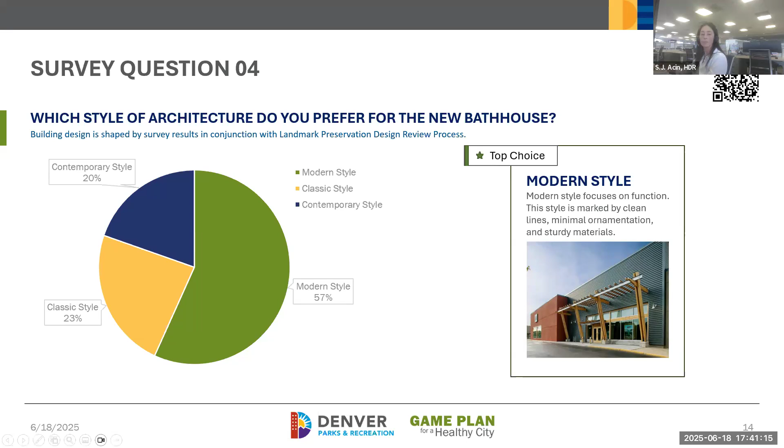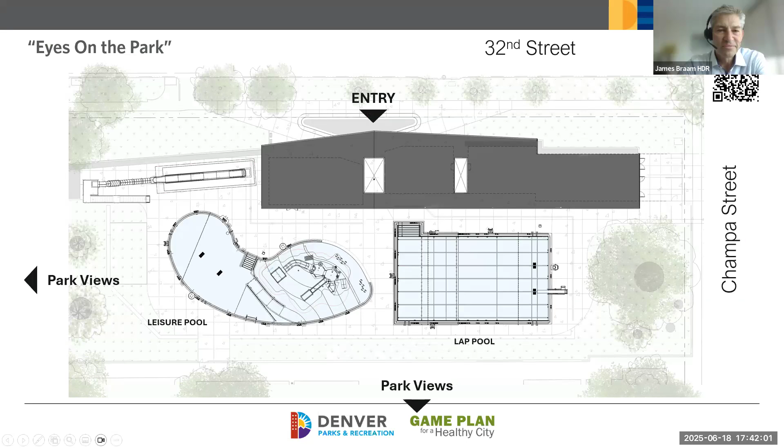Thank you, SJ. Hello, good evening, everybody. We're happy to be here with you this evening and share a lot of the hard work and feedback that we've been receiving, and put that into a lot of love and drawings.

This is a site plan that we're looking at. So the pool location remains at the same site, 32nd and Champa. But you'll notice a very big difference, something that we think is going to make this project a big success. The diagram has flipped and mirrored. So now the building and the bathhouse has pushed forward to 32nd, and the pools have pushed downward to the south, more towards the park.

What makes that really a nice move, a nice success, is that right now the pools look right out onto the street, onto the traffic. This starts to create a zone that celebrates the pool area and that pool deck. So Eyes on the Park now really celebrates the views onto the park. And now what is also happening as the building pushes forward towards the street, the entrance will be off 32nd, where we'll have a welcome plaza that we'll show you some renderings of.

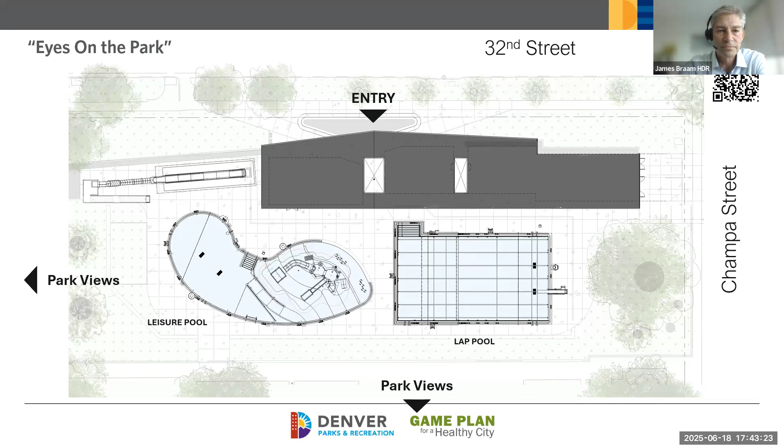As SJ had mentioned, going back to the survey and listening to the response from the community, we were pleased to be able to get your top two choices into the project. So being able to get not only a terrific play slide into the project that you'll see this evening, but also the diving boards into the project. And right now, those are tracking to be part of the design, and we'll be able to show you those as well.

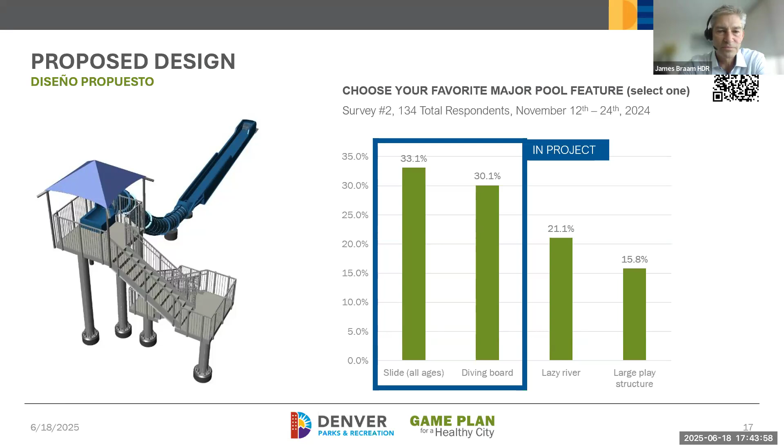Here's an image of that play slide, and the views that you will see, you will be up in the treetops when you're at the top of this deck. It will be essentially, I think, 17 or 18 feet tall. So any kid would love that. Probably the adults would even love that. But when you get up those stairs, you're going to have a view of the city, and it's going to be like being in a treehouse. So we're pleased that that is part of the project.

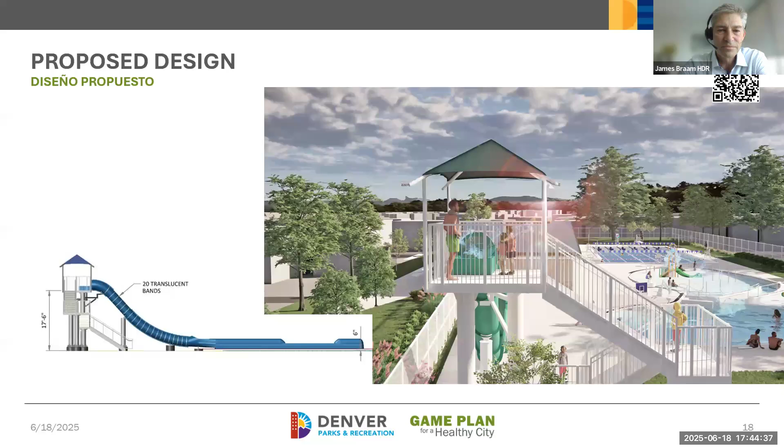Another survey question we heard was how do we incorporate your minor features. Here again, we're pleased to say that the top 5 minor features voted on by the community are in the project and expect to be part of the design, including the top choice of elevated interactive elements.

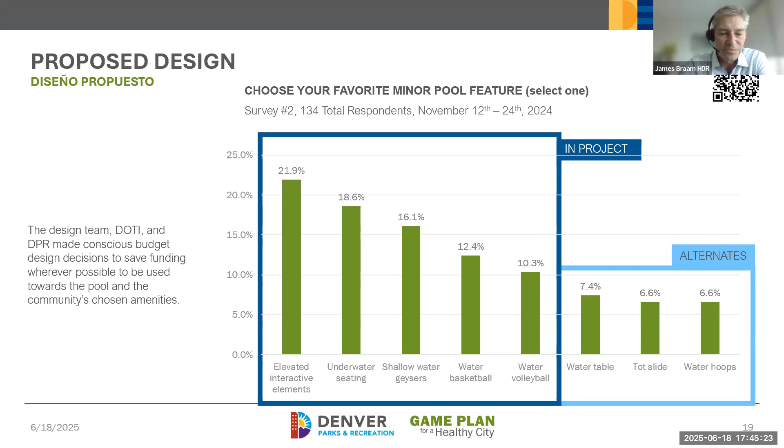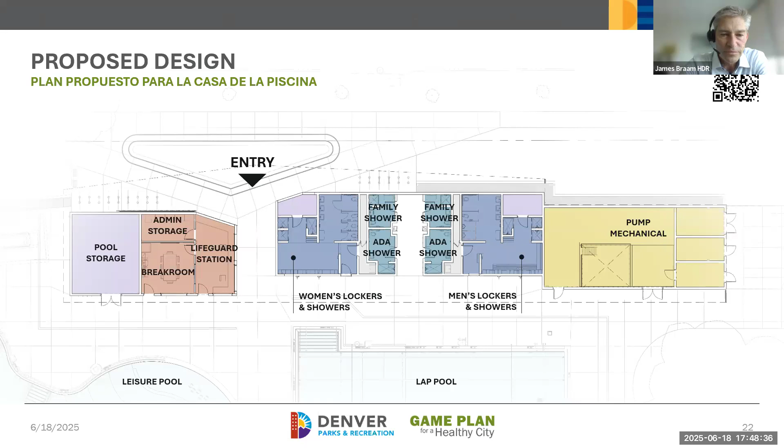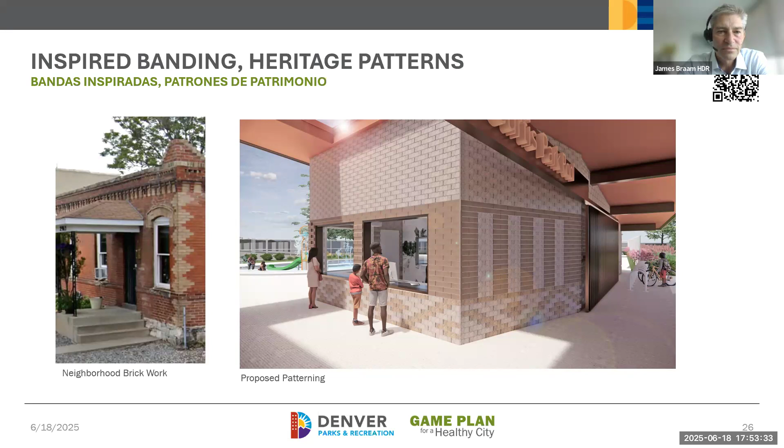So that sliding gate slides across, but you can still see into the pool. We felt it was important that you could still have visibility into the pool deck after hours. There'll be lights on the facility that glow both down towards the landscape and up towards that roof, so the building will have a soft glow in the evening.

It's also important to note this building is a civic building. We have a lot of rich history in the neighborhood, and this building is more akin, more similar to a pavilion in the park, than it is necessarily a house or a tall commercial structure. So we wanted to have that playfulness, that welcomeness, and even that feel of like a tree canopy.

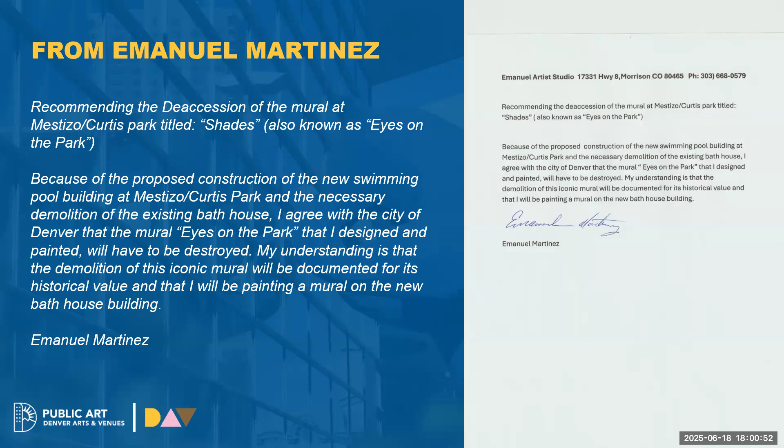To assist Emanuel in the creation of this new mural, we will be organizing a community conversation to generate at least 2 community-driven goals for the new mural. We will be hosting this in-person event at Mestizo-Curtis Park on July 22nd from 6 o'clock to 7 p.m.

If you'd like to RSVP ahead of time, please do. Laura is going to post that link in the chat. Or you can also feel free to stop by if you're around that evening. We may also organize a supplemental virtual session in the weeks ahead, depending on the strengths of the goals that are identified in that in-person meeting.

Please also know that you can reach out to us via email anytime. And to stay up to date on our events, please also visit our website and the event tab.

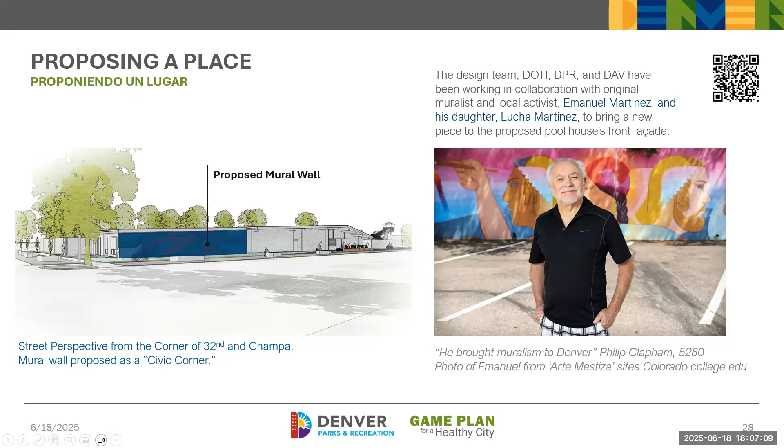And then we are also building around that large historic tree, and we are including that now in the footprint, whereas right now it is not included. So that will assist with shade also. We have done some shade surveys along with that to see where the shade is going to hit.

Let's see, when did the timeline change? We were told the opening would be in 2026. I'm so sorry that was miscommunicated, or that you thought that. The timeline has always been May of 2027, and that's also on our bond page.

Right now, we are working on getting this into permitting, and permitting takes about 6 to 9 months, and then construction is about 14 months. So that puts us at May of 2027. So I'm sorry that was not understood properly.

Let's see, we've got another question from Scott. You stated the design has been in conjunction with the landmark preservation design review process. The renderings of the building don't look like any other historic building in the district. Why is DPR and HDR not adhering to our landmark community guidelines?

So I don't know if HDR wants to chime in. We also have, I think maybe Crystal from Landmark may be on the call too.